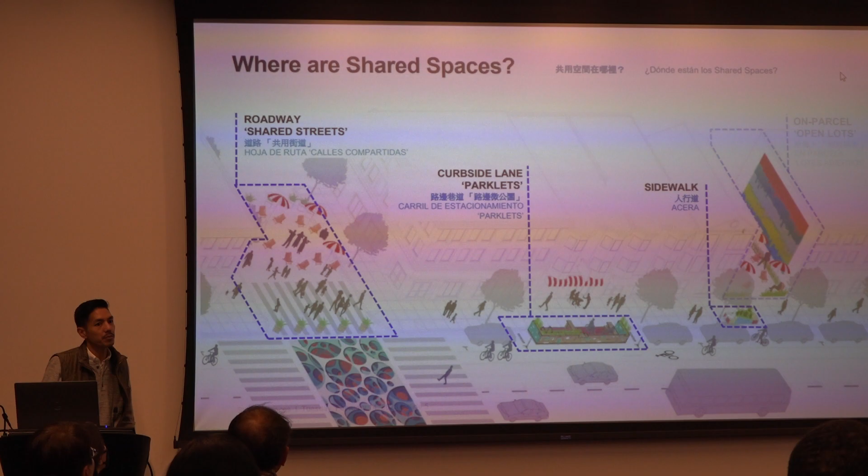Just as a reminder, shared spaces take place outdoors, in the streets, so sidewalk, the parking lane, on the roadway. The Shared Spaces Pandemic Program also permitted activations and pop-ups on vacant lots and parking lots. That's transitioning out of the Shared Spaces Program and into the planning department's usual planning permit scheme, so that's no longer part of Shared Spaces. But all of this other stuff, which it sounds like you folks are going to be helping communities do, will continue to be part of the Shared Spaces Program.

Grant applications are open. We do have equity grants available to help offset some of the costs associated with physical modifications to your pandemic parklets, for those ADA accessibility features, making sure we have the necessary clearances to allow our first responders, paramedics, and firefighters to do their work in case of emergency.

You can apply at sf.gov/shared-spaces-equity. Will this presentation be available, or should I be taking notes or photographs? This presentation will absolutely be available at sf.gov/shared-spaces, just this stub right here. Annie's really awesome about posting everything, and this is also being recorded, so I think today's recording will be posted, and we've done this training a few other times, and those have been posted as well. I'll follow up with an email to the group with the links.

In addition to the Shared Spaces Equity Grant, there is another grant through the Office of Economic and Workforce Development called the SF Shines Grant. This is for on-parcel, interior and storefront TI improvements. It doesn't apply directly to the parklet, but it's another way for you or your client to offset some of the expenses that come with making these spaces part of the permanent program.

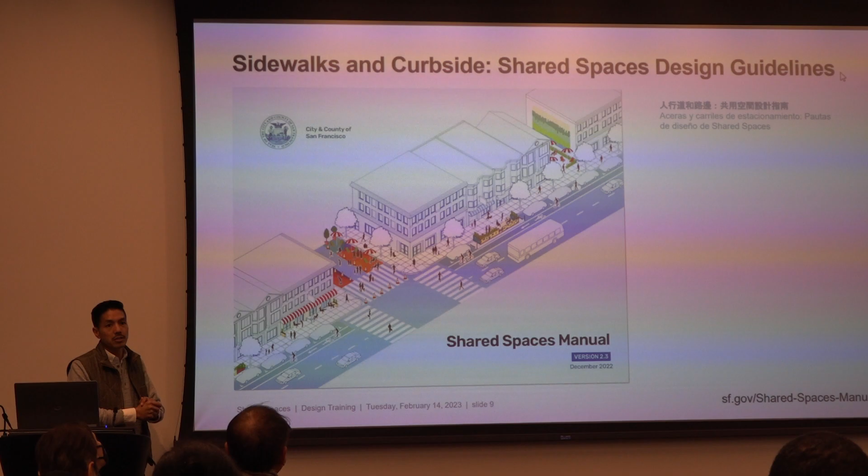Another really great resource, especially for you designers out there, is our manual, available at sf.gov/shared-spaces-manual, down there on the lower right. This is a really comprehensive guide. You have dimension diagrams, photos of real world conditions, what to do, what not to do. We encourage everyone, whether you're a small business, restaurant operator, proprietor, or a design firm or consultant, to use this as your Bible to make sure you are eligible for a post-pandemic permit.

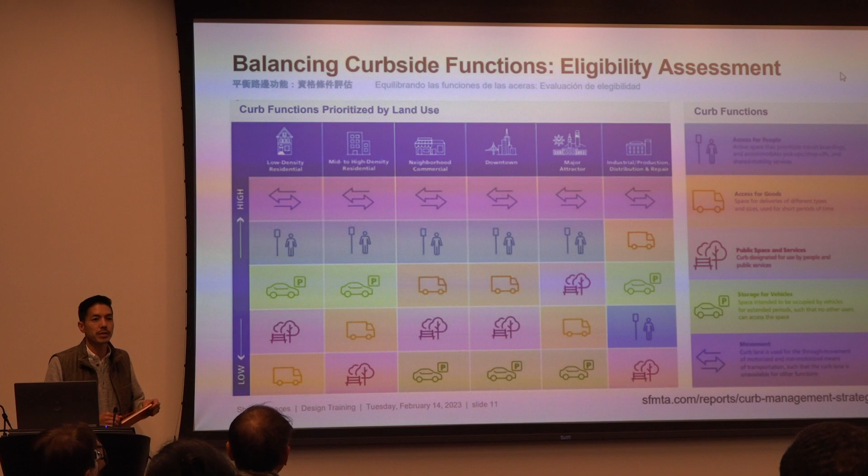So today we're really going to focus on, there are a lot of design considerations. Creating a brand new public space out in the middle of the street is a really complex design challenge. We're going to focus today on 3 or 4 of the main ideas that are really important to keep in mind. Before I do that, though, I'm going to hand it over to Monica from the MTA to talk a little bit about how the city's thinking about curbs in our corridors and balancing all those needs and functions.

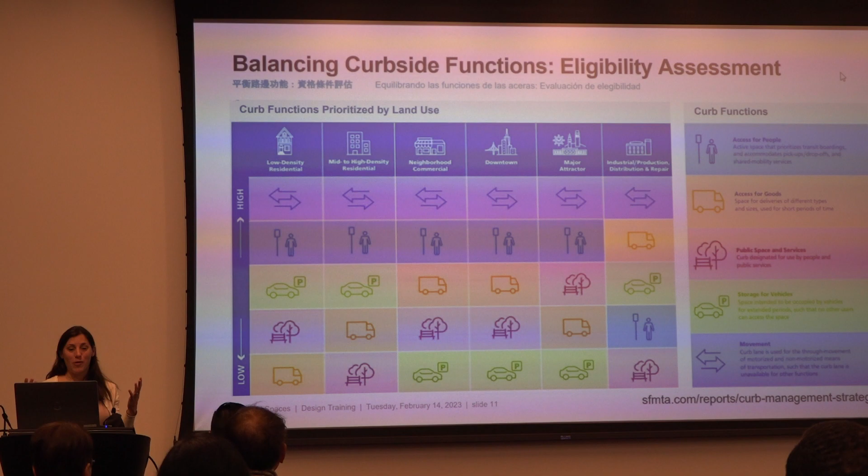Thank you, Robin. Great introduction. So my agency, SFMTA, oversees the public realm, streets. Our partnership and role in shared spaces is to make sure, like Robin mentioned, that these new public activations in the street can balance all the other needs that a street serves.

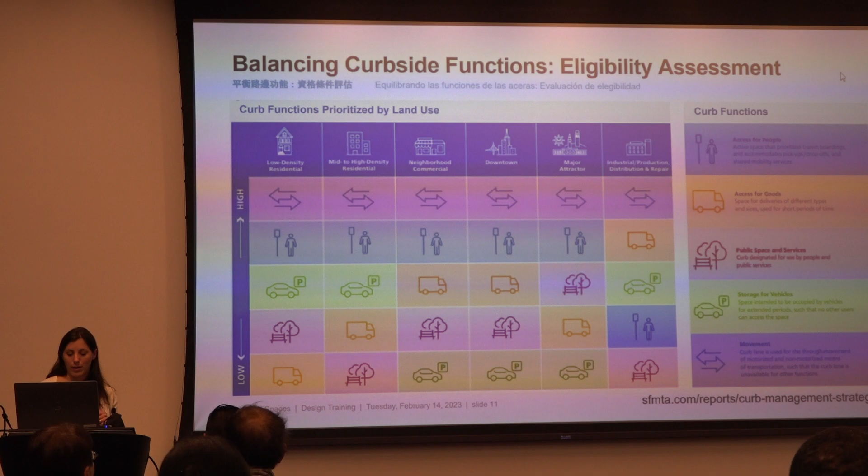This diagram is pulled from the city's curb management strategy. Particularly, I think what's interesting is the third column, neighborhood commercial - this is mostly where we see shared spaces, and this is how we prioritize and allocate curb space. Movement is primarily important in these areas - access for people, access for goods - and then public space and parking follow. That's the hierarchy we approach our methodology with.

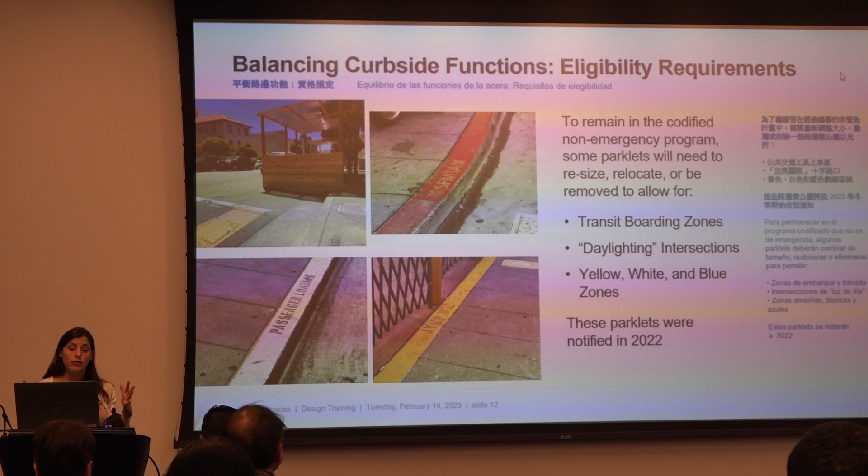So what that looks like on the ground - how we apply that - is we visited every corridor, every block, because every block has unique characteristics and needs. We assessed transit presence, how many curb cuts there are, loading needs, parklet demands, and created a bespoke evaluation so that when parklets and businesses apply, we have a sense of how much space can be occupied in the public realm. Is a footprint of one space okay? Can you have two spaces? Does that need to be shifted to accommodate a transit zone or loading zone? That's how we apply it in practice, unique to every block in San Francisco.

One of these hierarchies is safety, Vision Zero. This is a low-cost measure of improving sightlines at intersections, really effective, where we can paint red curb at the near side and far side of an intersection, making sure a parklet clears that distance. Generally we like to see 20 feet near side - the beginning of an intersection - and 8 feet far side, after crossing the intersection. That ensures clearance and visibility of turning cars, so they can see people tucked behind a parklet structure. Some parklets are bigger than a parked car, so we're more generous with this daylighting requirement, since parked cars are smaller while parklets are there all the time and are taller.

Another requirement I like to talk about, new with the program we're transitioning into, is the 2 parking space cap. This allows us to balance the street, bring better balance back, and ensure we're meeting all the curb demands I shared about earlier. Of course there could be exceptions where it's possible to have more, but this is a good anchor point. Some locations may only support 1, or hopefully not none, but this is the max we're looking at, whether it's a perpendicular, parallel, or diagonal space.

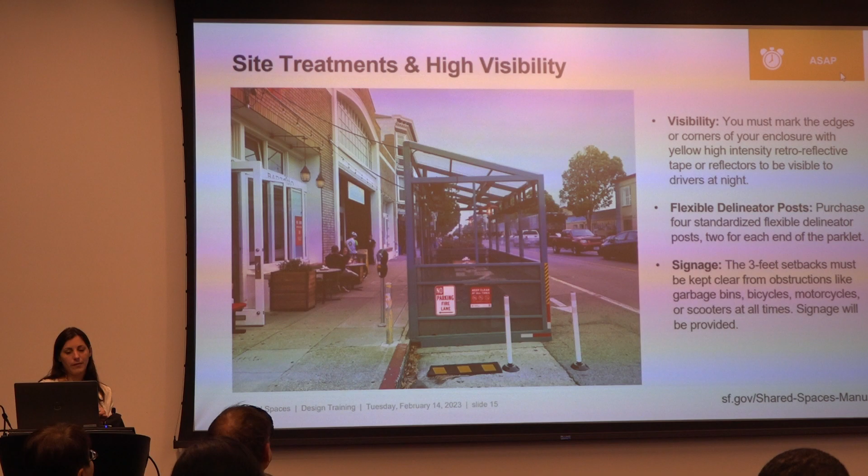This example calls out what we talked about - visibility at the crosswalk, the cap - and also the 3-foot setback. What we like to see is a movable curb and flexible delineator posts. These are low-cost measures, easy to install, and there are supposed to be 2 delineator posts plus that curb at the 3-foot setback on either side. If it overlaps with the daylighting, as this example does with the red, you may not need an additional 3-foot setback - it may be possible for that to overlap.

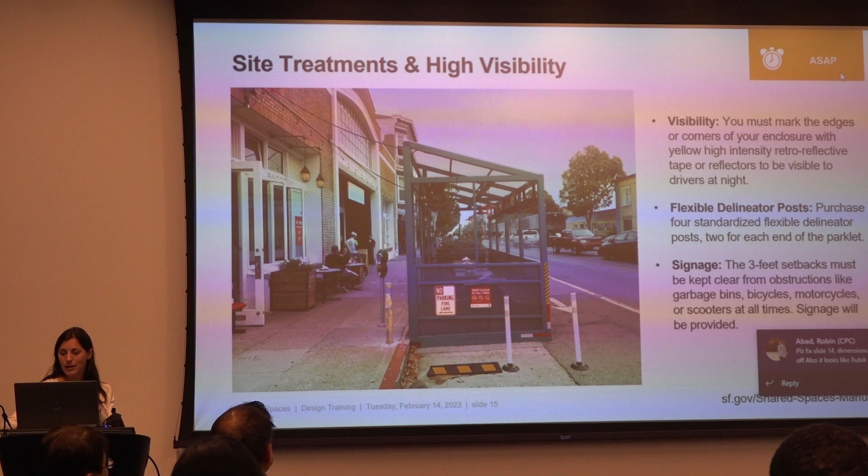This example shows why that's really important, not just at the end parked vehicle - ensuring the wheel stop helps so the car isn't backing up into a parklet structure. Also shown is what that looks like between two parklets - you don't want two parklets too close together without a desirable gap for emergency access. So these are some good examples, and what we want to try to avoid.

I'll pass this off in a moment after talking about some of those primary SFMTA elements. This slide shows a variety of the high priority categories we want to talk about today, including setbacks from crosswalks, which we already covered, and other things like making sure you have your address on the outside of the parklet. That's really important - it helps emergency access see they're accessing the right building if it's blocked. On the building itself, reflective materials are really effective and low cost to have on the outside of your parklets. Visibility above 42 inches, we'll talk about that more - that was in the PSA. Some of these show the fire department priority categories, like the gap in the middle and visibility above 42 inches.

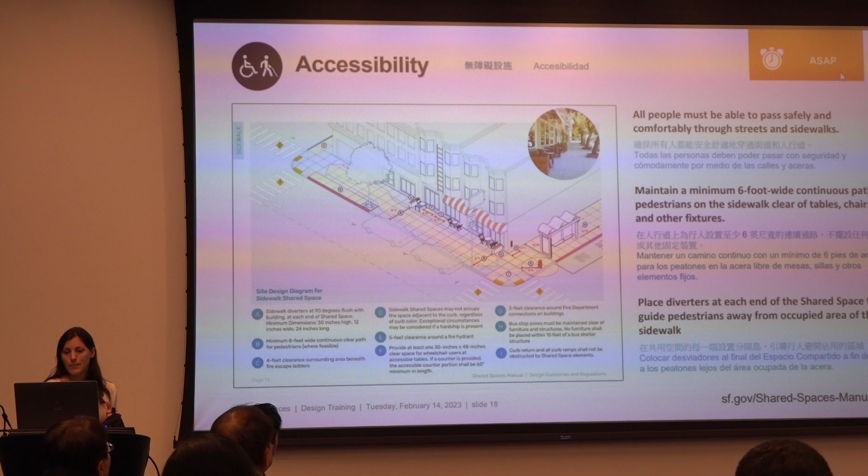So I think I'll kick it back to Robin at this point, and I'm not sure what we'll bring up for a minute.

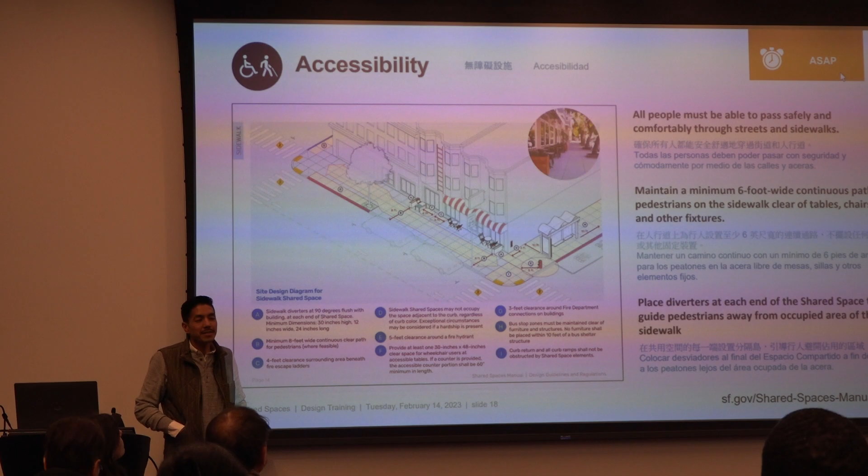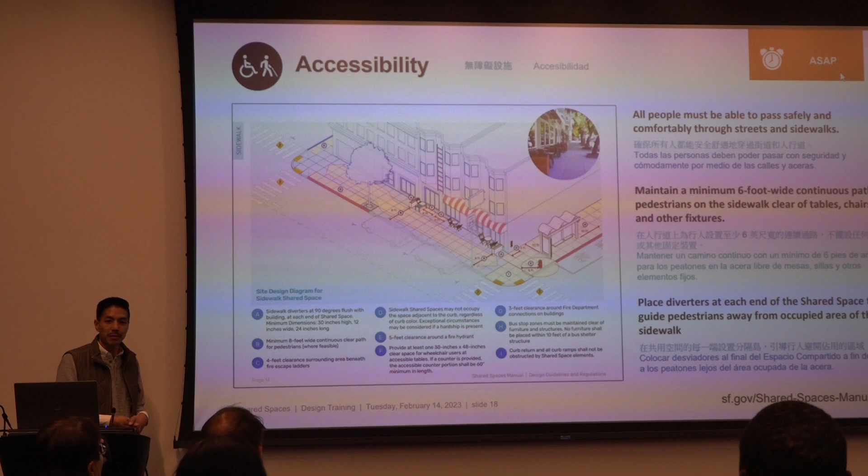Great, so some basic ideas about maintaining ADA accessibility on our sidewalks as well as within parklets. A lot of these guidelines have existed for a long time, so folks in the room who own a restaurant and maybe have some sidewalk seating outside are already familiar with the need for some of this. The biggest takeaway, and the thing we get the most complaints about, and the thing we are most anxious about when it comes to a lawsuit, is maintaining the clearance on the sidewalk.

This is a challenge, right? In SF we have narrow sidewalks. We don't have generous sidewalks in all of our commercial corridors. We've got bike racks, tree wells, parking meters. But really what we need to be mindful of is having at least 6, if not 8 feet of clearance at all times that is totally unobstructed by tables, chairs, A-frames, bus carts, anything related to your dining service and operations, or any of your retail operations - they really need to stay out of that 6-foot clear zone.

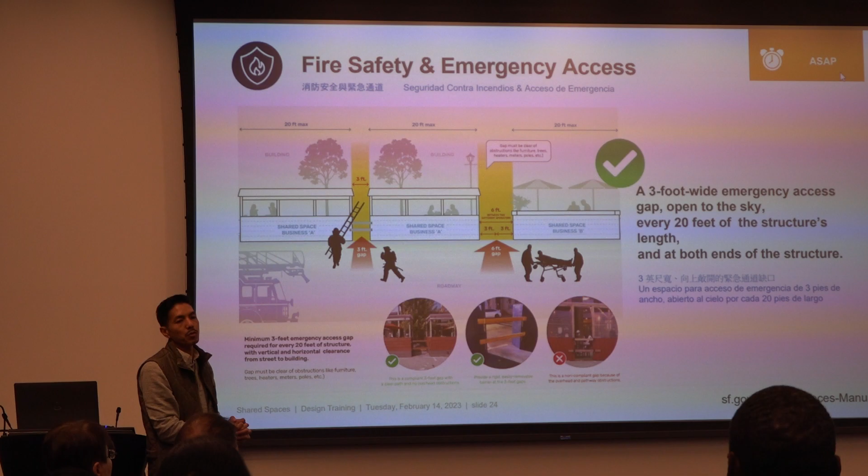You're absolutely right, curbs are not standard. We've got 100-year-old granite curbs that in some neighborhoods have subsided and are lower. The standard is a 6-inch clear gutter right at the curb. But if you're working with site conditions and you're otherwise able to maintain clearance for drainage, maybe you're making that clearance under the gutter—we'll look at a diagram of this later—maybe it's more than 6 inches wide, so that you have the equivalent of 36 square inches in area for water to pass through. More on that a little later.

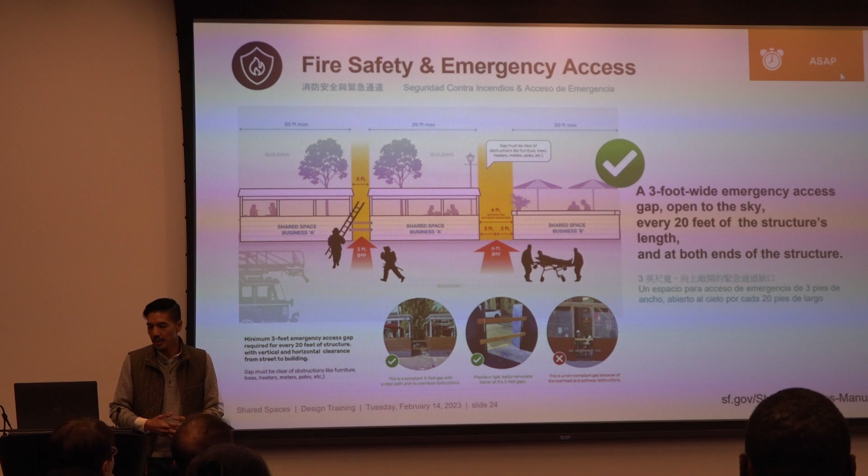So I'm going to pause here, and I'm going to invite up Assistant Fire Marshal Chad Law to talk through a few of these slides pertaining to design for accessibility for our first responders.

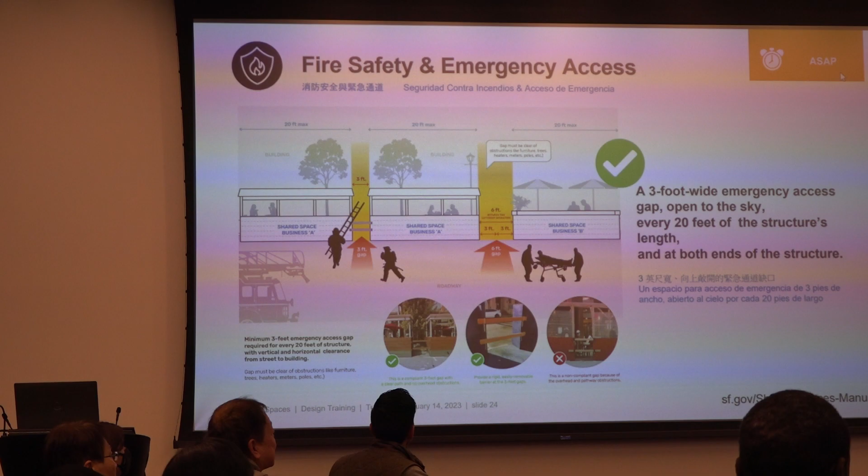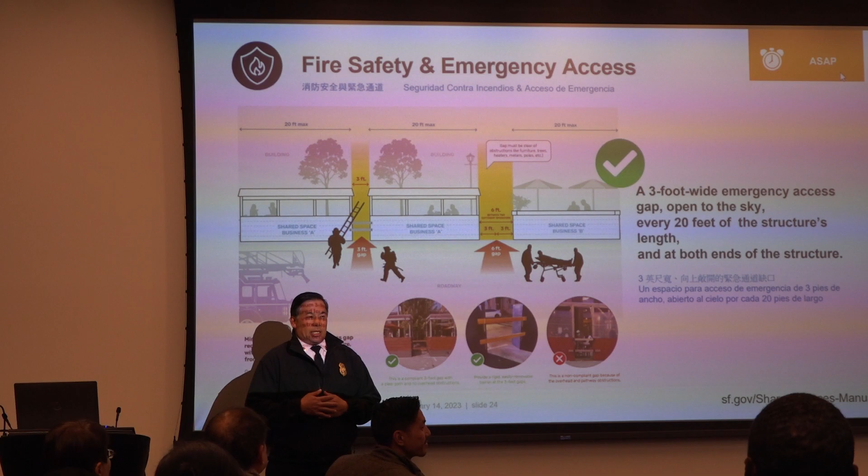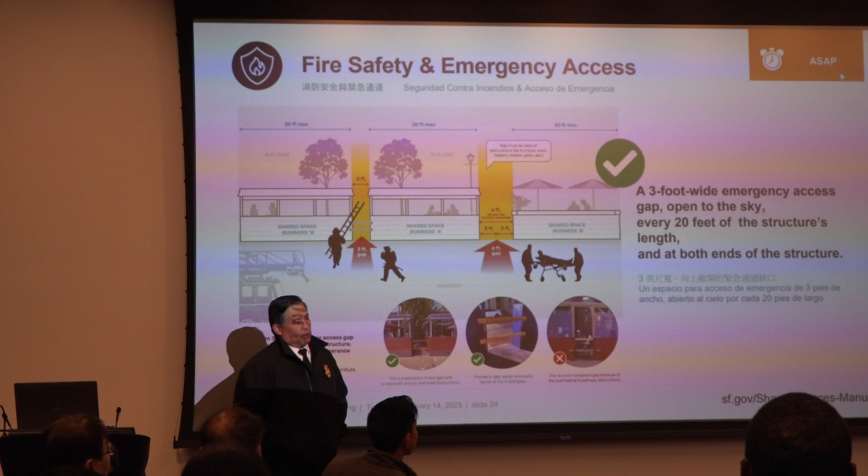Hi, good morning everyone. My name is Chad Law, Assistant Fire Marshal for the Bureau of Fire Prevention and Investigation. I work for the Fire Marshal's Office. I've been working with this program since the beginning of the pandemic, so it's evolved a great deal, and we've collaborated this entire time. I want to introduce Inspector Brandon Murray—I'll give a brief overview, but I'd love for him to explain some of the details since he's actually out in the streets.

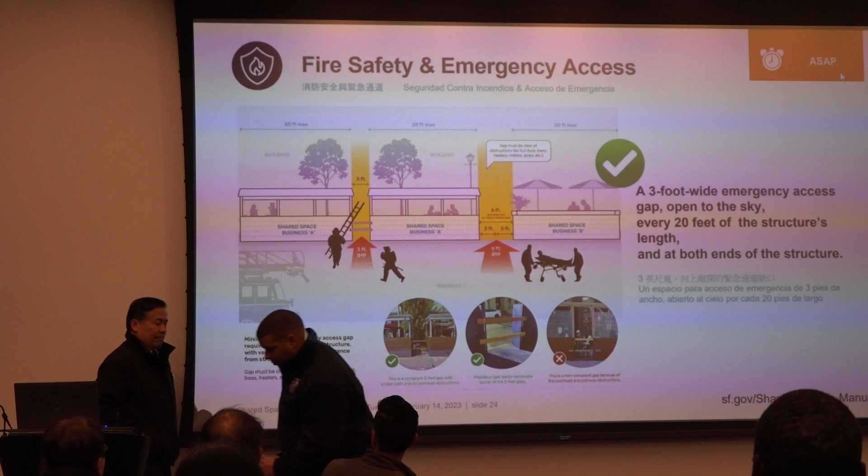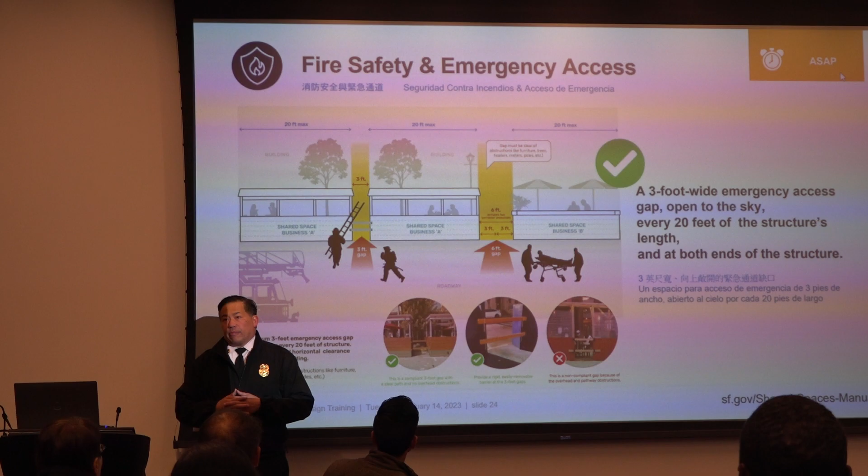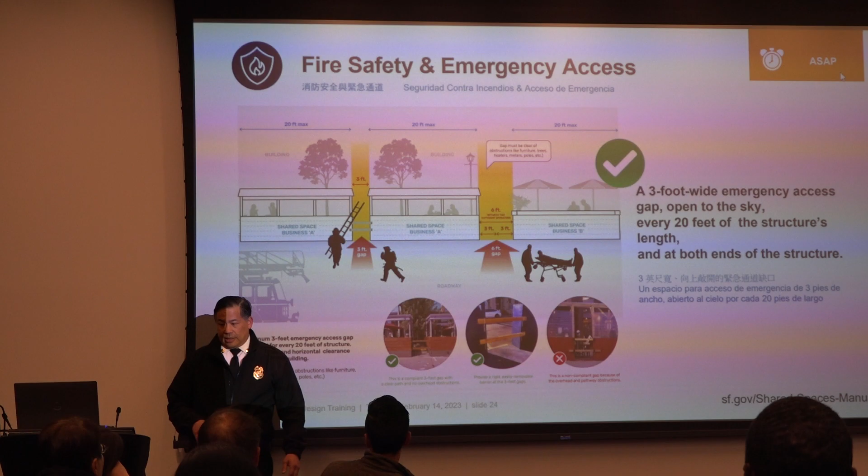First of all, I want to tell you why there's a lot to think about when you're building your permanent structures. For us, it's simply that we're used to being able to go in between cars, and every time 911's called, it's time sensitive. This is my 25th year in the fire department, and I've worked in North Beach for 18 years. Every building and restaurant is completely different—the structure, the roof lines. We've created these guidelines that are pretty basic, but we need to get through the streets and to the buildings as soon as we can, whether it's a fire or a medical call. It's time-sensitive, so that's why we came up with this as an interagency group. 3 feet is kind of general, but there will be questions at the end.

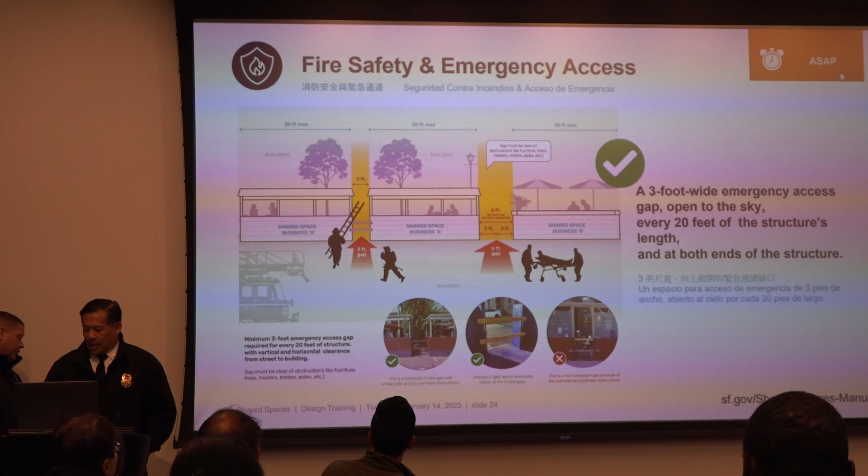So right here we've got the emergency access clearance, and it's supposed to be open to the sky. So for your shared space or parklet, every 20 feet you're going to want to have an access gap. This allows the emergency crew to access any equipment through it—gurneys, ladders, any equipment passes through this gap. That way a ladder can reach the building or restaurant or structure, to protect the patrons, the shared space, or the building as well.

So right here, through the gap, this is required—we have the 2x4s in place marking the emergency gap. In the field you'll see doors, but you don't want to use doors because that blocks our gap. So here there's no 3-foot gap applied, and with this shared space and other shared spaces, there's no 3-foot gap either.

Congratulations, this is—it's a microphone. Oh, it's a microphone, okay. Oh, we have a question in the back.

Go ahead. Yeah, for these gaps, on electrical, do you guys prefer an electrical wire cover where the gap is, or would that also be a barrier for you? Any electrical or any decorations and lights in that access is not allowed.

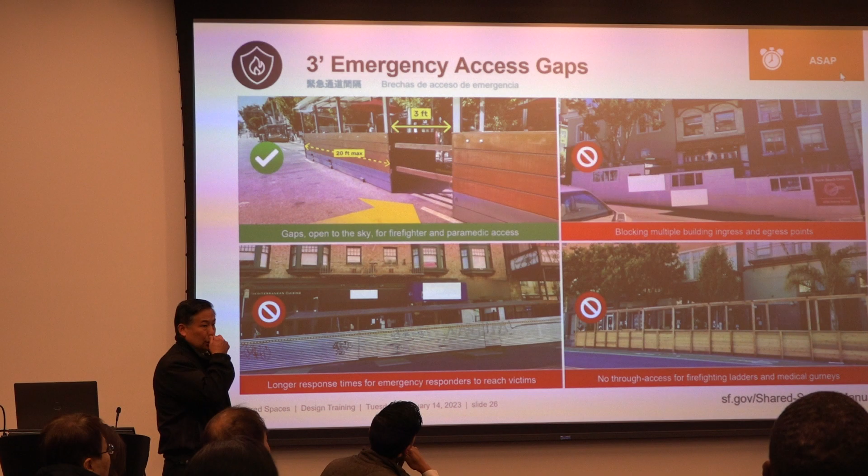But if we need to run a cord from one part of the parklet to the other, can we run it? It's supposed to be on the corner—I don't have a picture of that, but the corner of your parklet or shared space is where the cord runs through to connect. But how can the cable cross the 3-foot gap? That's the whole point—like the ladders, when it says clear to the sky, it means clear to the sky. So where's the electrical cable supposed to run? Suppose the cable from the building is on that pole.

Right, and it crosses the gap, it can go underneath. We literally want to do this. There's gonna be a case-to-case basis and different ways to do stuff. Maybe you run it under decking, something like that. But this is our goal, if that just clears it up.

You may have answered this before I came, but the 3-foot gap, can it be anywhere within that 20-foot park space, or does it have to be exactly in the center?

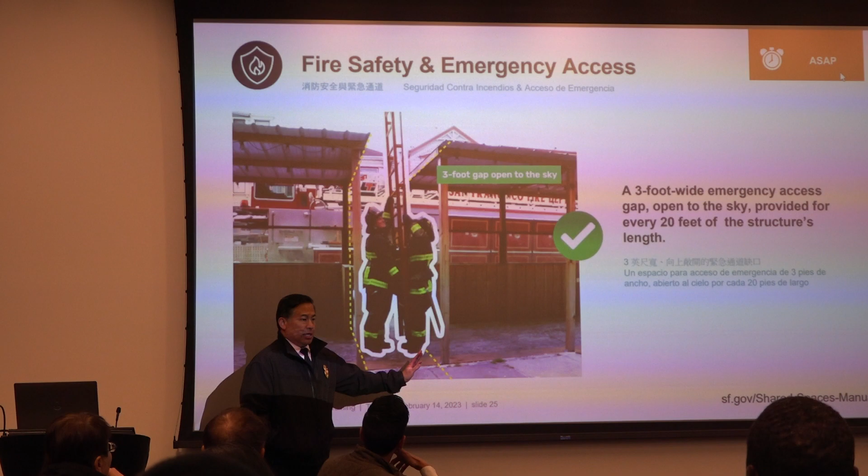Here's the deal, a lot of times there might be a little offset because we don't want them lined up with trees or parking meters, since that defeats the purpose. So we do want a break in it, and 20 feet is straight, but if you have more than one, you need 3 feet between the two spaces.

So if you only have 20 feet, you don't need a 3-foot gap. If your parklet is 24 feet, that's good enough.

So this is the main reason I'm here. We built a parklet that is 25 feet wide, and we did everything to code, spending a lot of money doing it all to code at the beginning so that we would be able to keep it. We put the 3-foot gap in the middle, we have the 2 separate roofs, everything's to code, it was all approved.

But now they've changed the code so that we have to bring it in 3 feet at each end. In essence, you guys aren't really gaining anything out of that, because we're gonna take away the space in the middle now, but we will have to completely knock down a $20,000 parklet and build it from scratch.

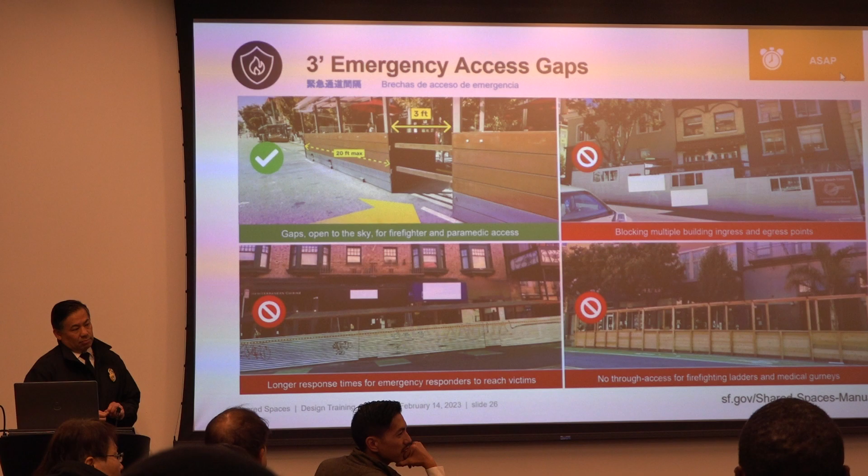It's just to move the access from where it's actually better right now to the side, and I'm trying to figure out, because I've heard a couple of times now, Monica mentioned it, Chad mentioned it, every block is unique and has different needs. Every building is different, but we seem to have one code that fits every situation.

There will be, yeah, we'll review it case to case, but the reason, do you guys know the reason why we have 3-foot setbacks on those?

So the idea is that if we have the general rules that apply to most of the parklets, or shared spaces structures, we have that 3-foot setback.

So in that case, that's something we could review and look at, and maybe you're open on one side, or you're in a corner. No, we're in the middle of the block, there's no parklets on either side of us.

So the question for us is what happens in the future, the next business that wants to do it, they get a smaller parklet because yours is built already. So I don't know, that's the weak point, can you address any of that?

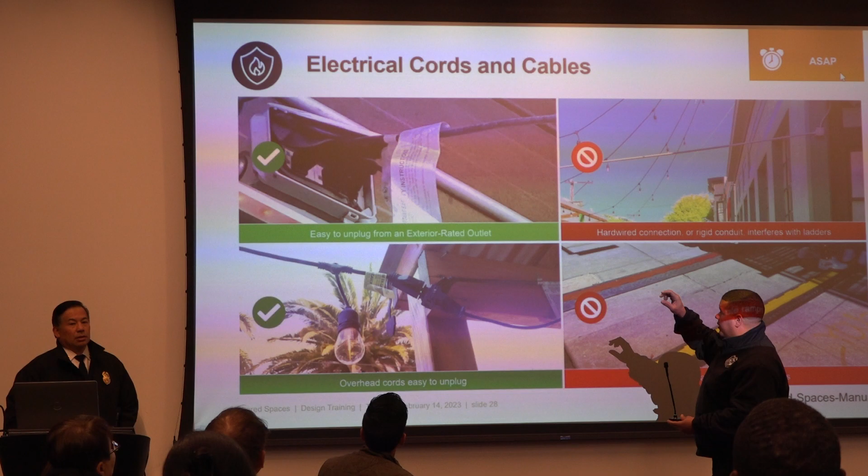Similar ideas, as you can see with parking meters: we don't want anything like chairs in there. I think it's pretty self-explanatory. Chairs, decorative lights - you talked about this earlier. Like you said, if you have electrical wires or decorative lights connected to the shared space or the building...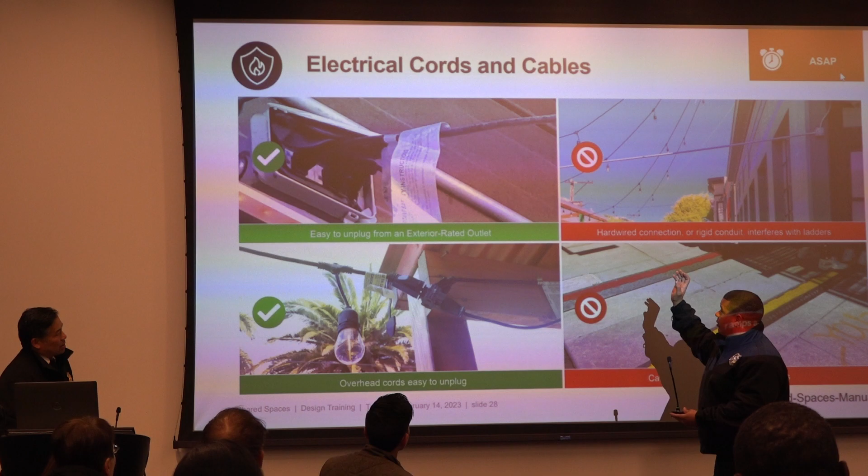If that also blocks the 3-foot emergency gap space, it can't be allowed. It's supposed to be only on the corner ends, and the receptacle needs a quick disconnect. We have a tool, a hook, so if a wire is connected to another wire, it won't be easy to just pull off. In emergency operations, depending on how the wire is connected to the receptacle, it's easier for us to use a tool to just pull it out.

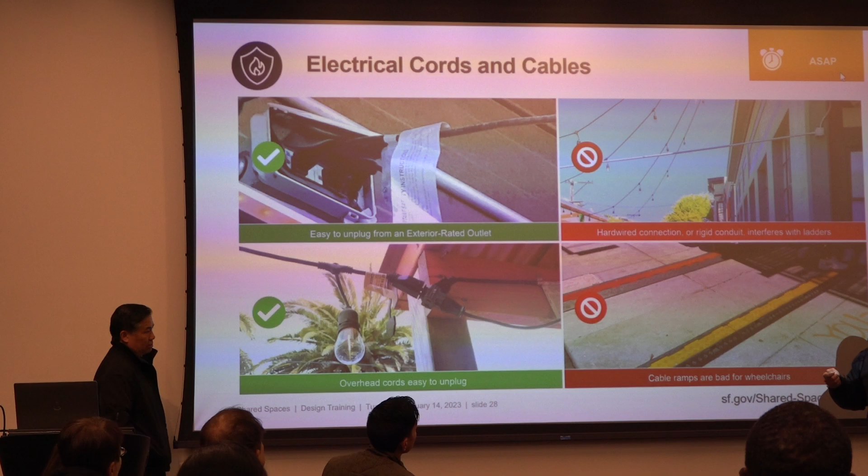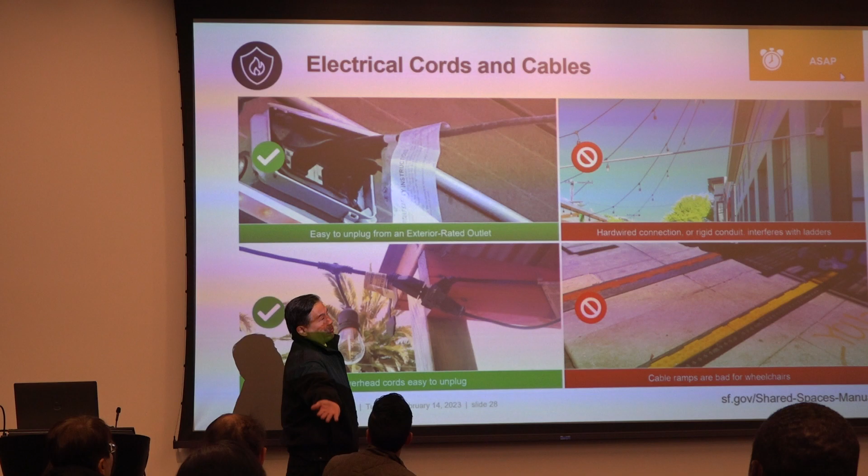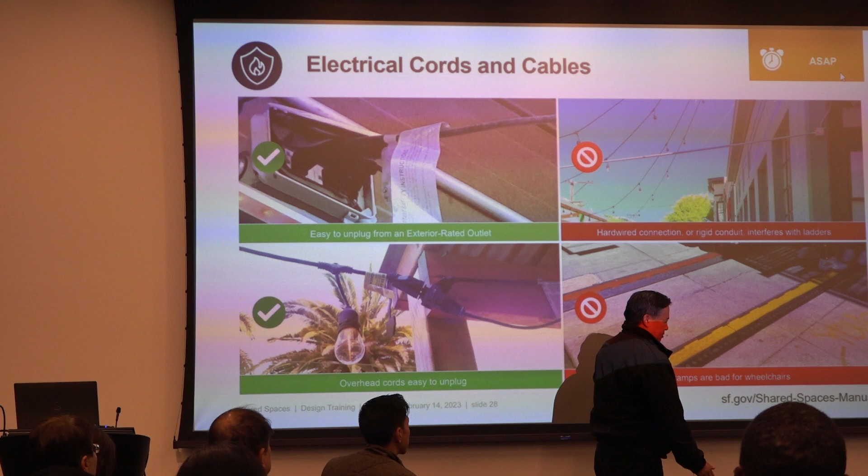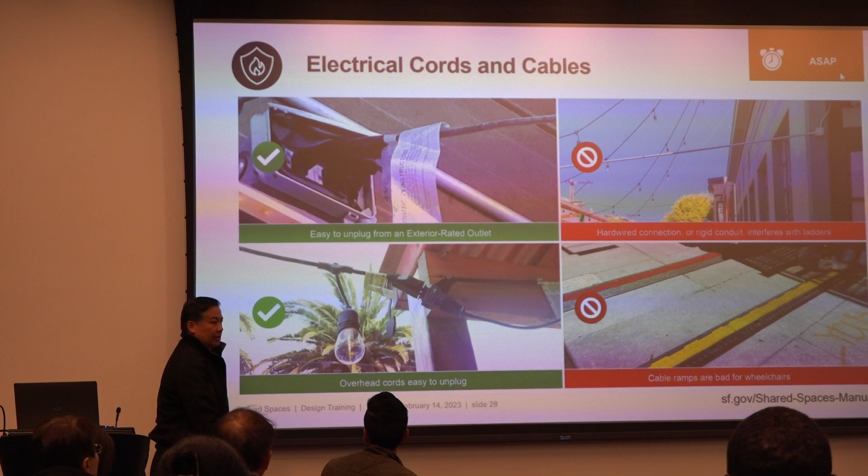Also, strategically, if there's a tree nearby, we raise ladders this way - if this is the building, we'll raise it this way. If there's room between the cars or parklets, it's actually easier - that's called a flat raise. Otherwise we do a beam raise, where we lay the ladder down about this far from the building and then raise it this way. As we raise it, it's super heavy - they're made of wood, hundreds of years old - and any obstruction delays it. We can't let that happen when we need to get to a window. I've rescued people out of windows before and gotten them down; we don't want to delay that. So these we can just pull down with the ceiling hook and then raise it, and it's super fast.

Talk about sightlines if you want - I can sneak across the street, or... visibility is a big thing. If there's a fire, even a kitchen fire, a flue fire, or a trash can fire, we have 13 rigs - you know how many people that is? 87 or something like that - showing up within 5 minutes. The incident commander stands across the street and is responsible for the safety of all the civilians coming out, the firefighters, the streets. If this is blocked up like a wall, he or she can't make calls. That's why visibility is a big deal. If it's opaque, we can't see if the fire's creeping out on this side or that side, or if someone's in the window. So that's the visibility factor, over 42 inches.

Just real quick, Chief - that's all directions in the view. So your shared space, however the picture is cut off, sometimes you have ends, but the whole entire view is supposed to be 42 inches. The chief across the street is really like the quarterback making calls, and once it's all blocked, he can't see if the firefighter is injured or not. That's what we're going for there.

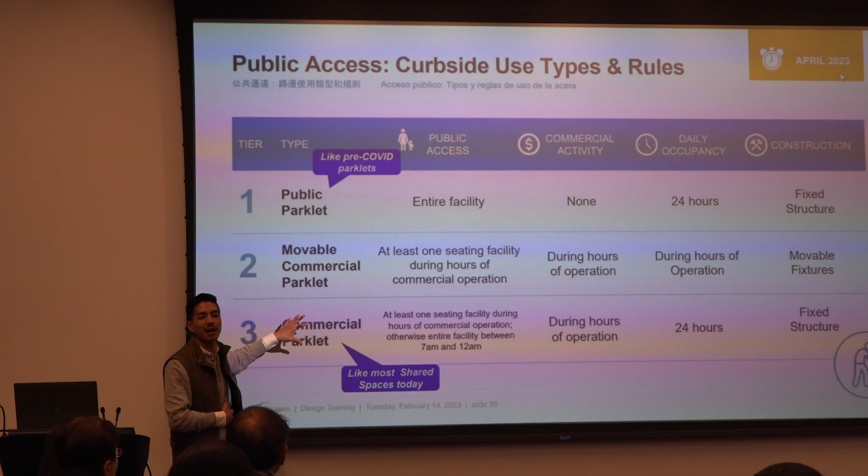We didn't have commercial parklets before the pandemic, so that's the operational compromise the Board of Supervisors reached after discussing that provision a lot. So folks who pass all your final inspections—everything looks safe and accessible—you'll be getting your signage package from the city, and one of the things it will include is a sign for your public seating area.

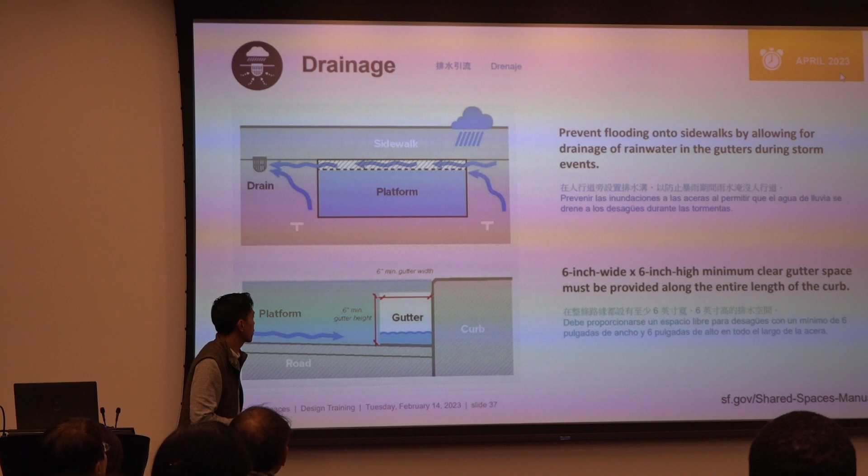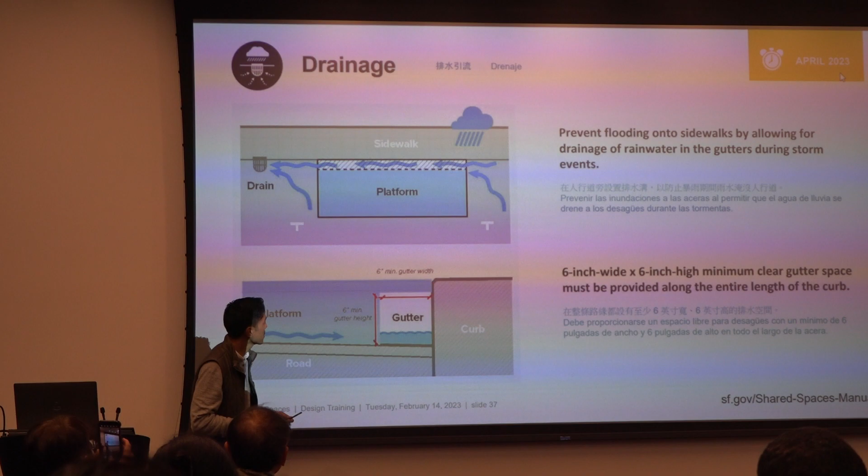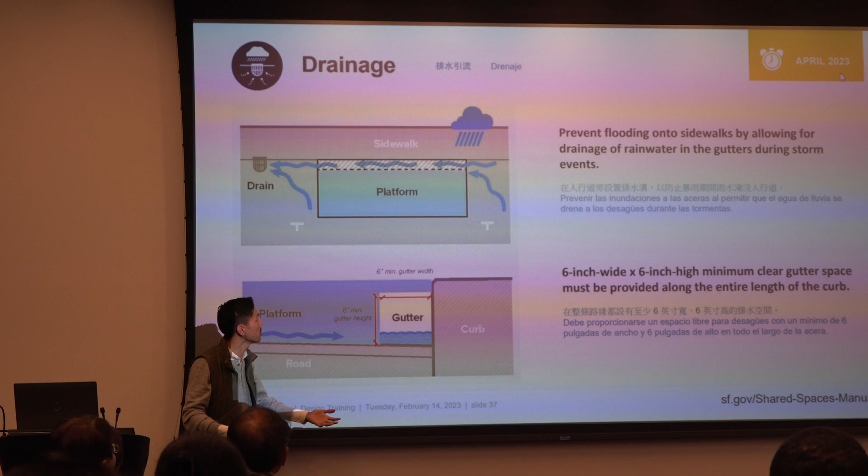We talked a little about drainage earlier. There was a question about how you maintain a 6x6 inch box all along the curb if your curb has subsided, which happens in a lot of places. Again, this is the ideal standard, and our goal as city departments is to work with you to help meet the performance criteria. The point is we don't want our parklets blocking up drains. Flooded gutters mean flooded sidewalks, flooded sub-sidewalk basements, and flooded storefronts—it causes all kinds of issues.

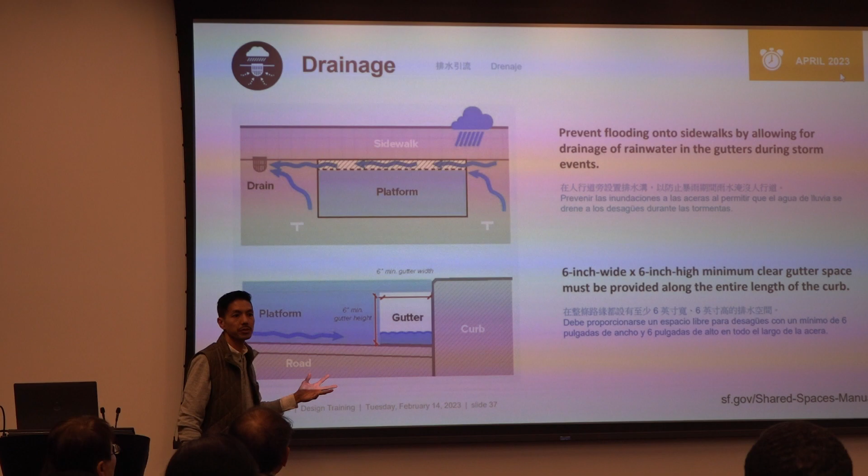It's a really simple design detail that a lot of you have already implemented. But moving forward, as we transition everyone to a post-pandemic permit, we're going to want to make sure to fix that. This is a condition we do not want to see.

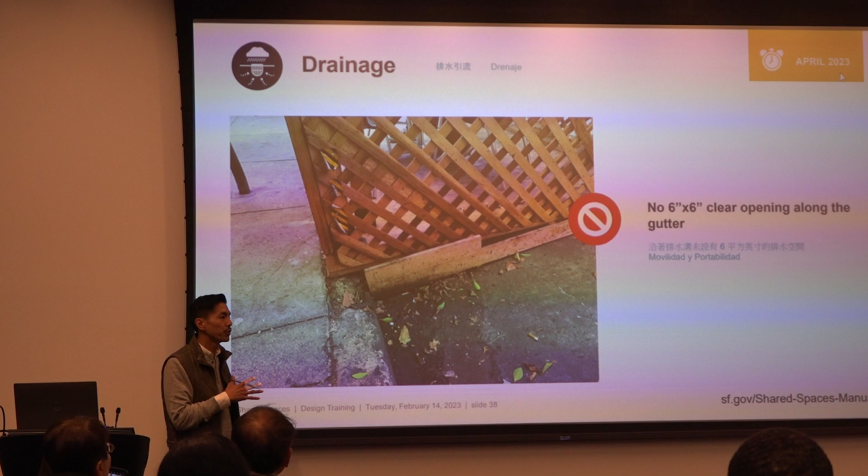We don't want to see this. This is in my neighborhood—that's my parklet. Is this your parklet? Yes. Okay, we try to block out everyone's names. I've taken it down already, it's not there anymore, but yes, that's mine.

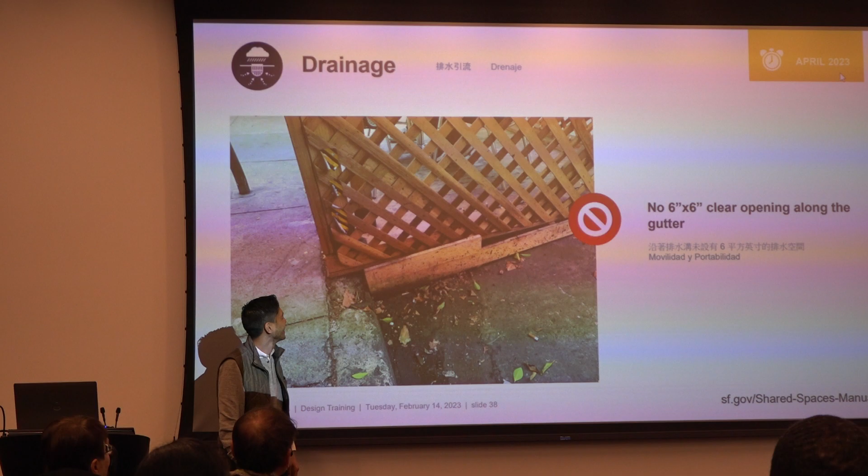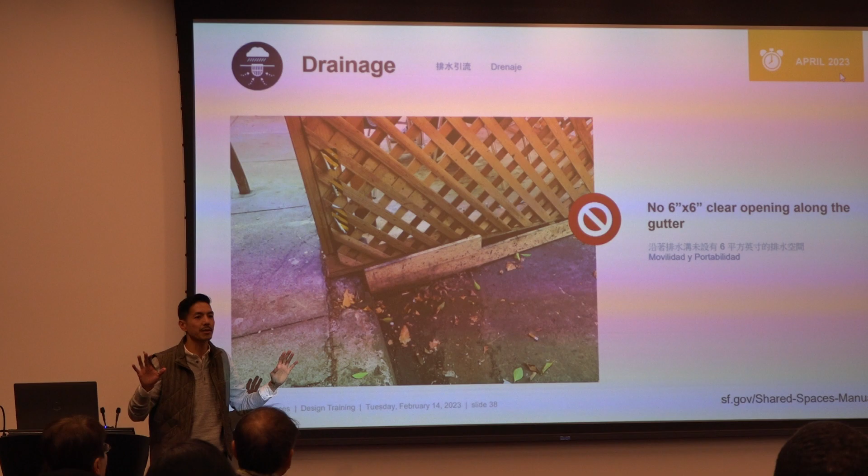The reason I bring it up is because I came here on a day where it wasn't wet, but I had seen this in the past with water coming up—it would build up on the parklet deck and sort of overflow onto the sidewalk. Nobody wants to slip and fall in front of their business or in their parklet. We don't want to create any dangerous conditions.

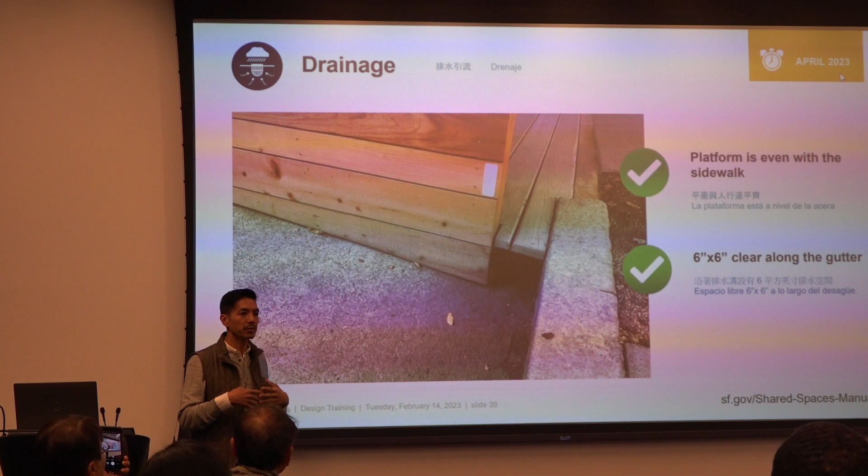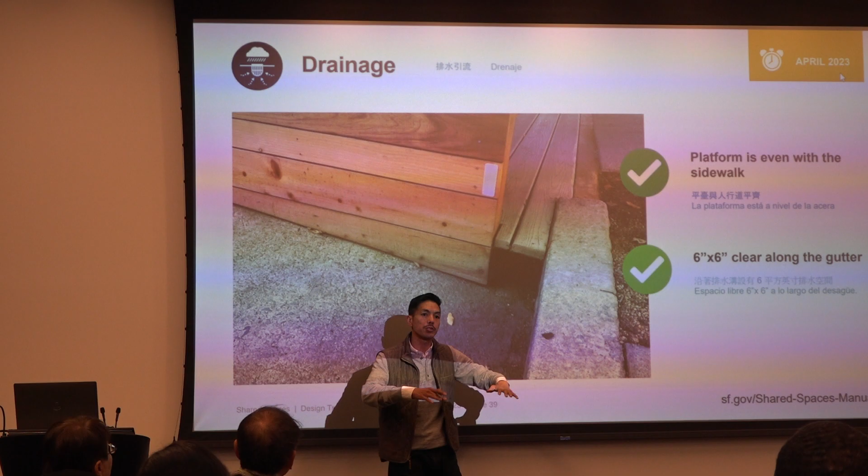So here's a situation that's ideal—you've got a clear gutter. A lot of times designers will slap some mesh or screen onto here, or make panels along the curb removable so you can get in there and power wash. Again, we're not going to be strict with you about how precisely to build it—we just want you to meet the performance criteria of keeping rainwater flowing.

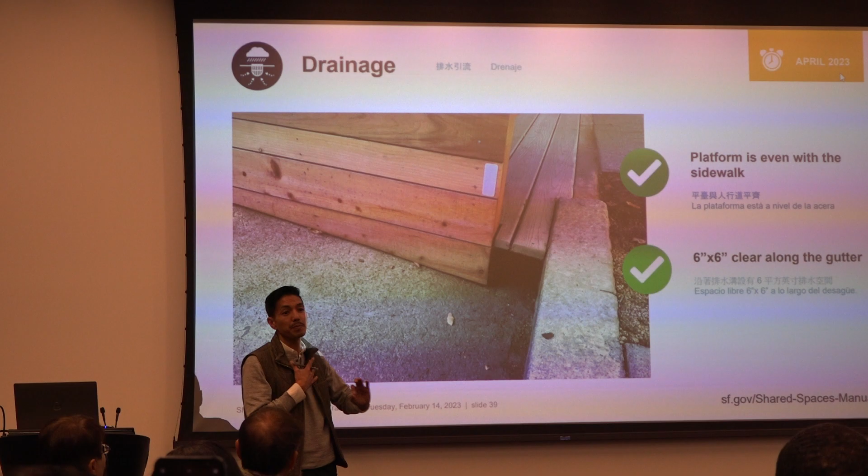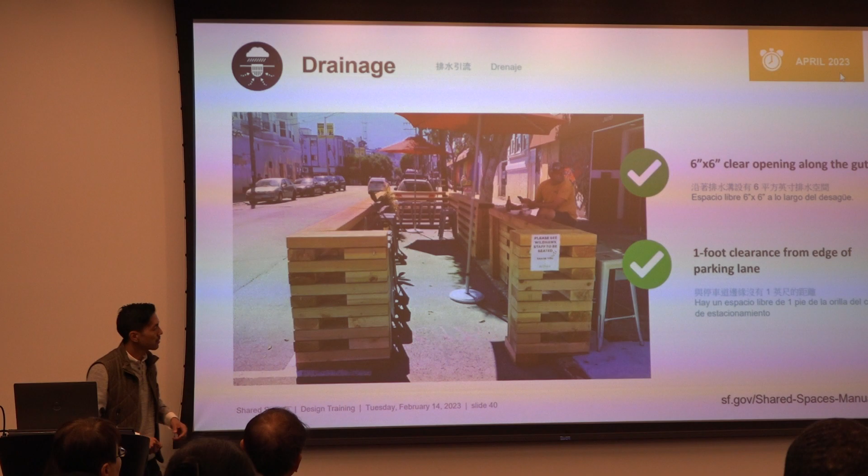Can you go back to last? So in that case, there's no 6-inch height for the curb, that's what it is. So if I had a 6-inch curb in front, I cannot do this? Probably not—that's in front. The point is that water can run through this, right? I'm talking about storm. The deck is part of it. There is no deck here. Right, I know, so that's because the curb is very low, that's what it is.

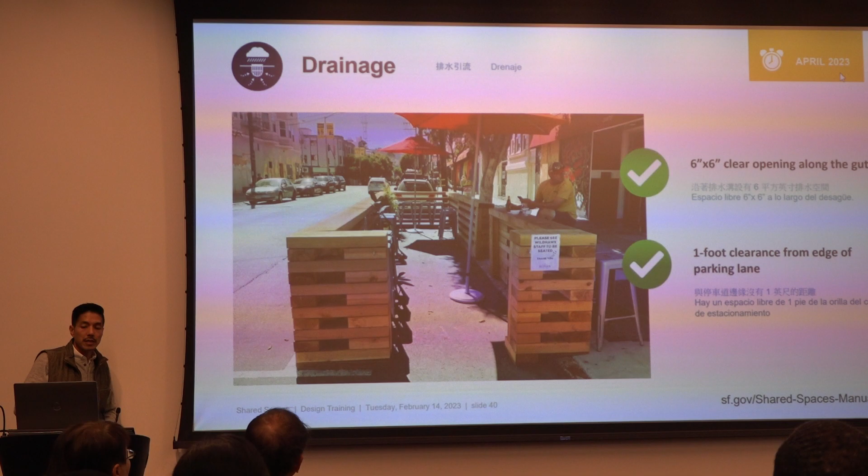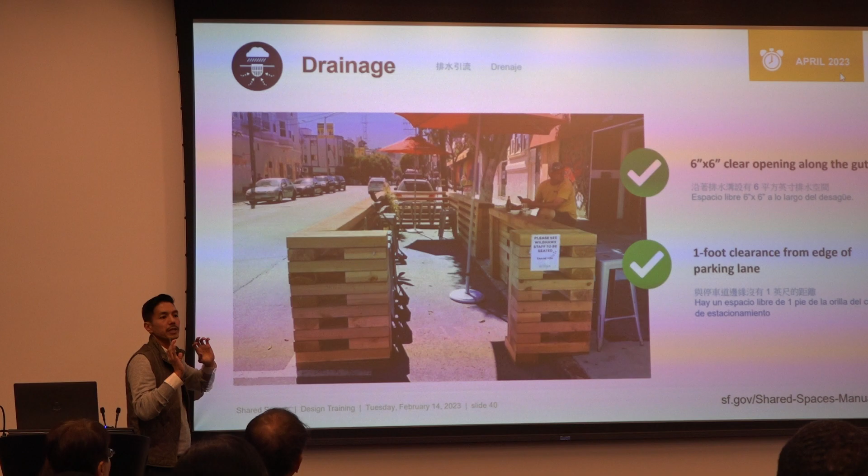I have a question back to this one—you're providing parking on the other side of the sidewalk, do you still need to put a ramp in order to give access? Could we take the equivalent facilitation on the other side? You mean for ADA seating? During the pandemic, if you had sidewalk dining tables and chairs along your building and a parklet, you only needed to provide ADA accessible seating on the sidewalk—they would count as a unit. Moving forward, what the Mayor's Office of Disability wants to see is an accessible table inside the parklet, or an accessible facility.

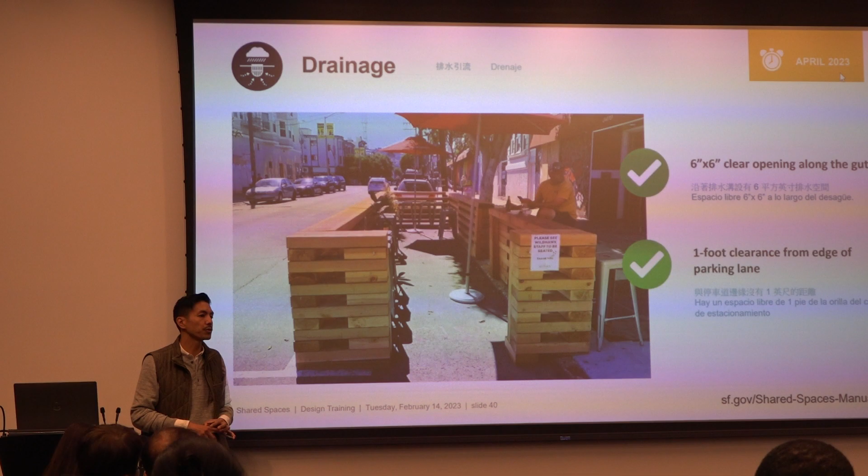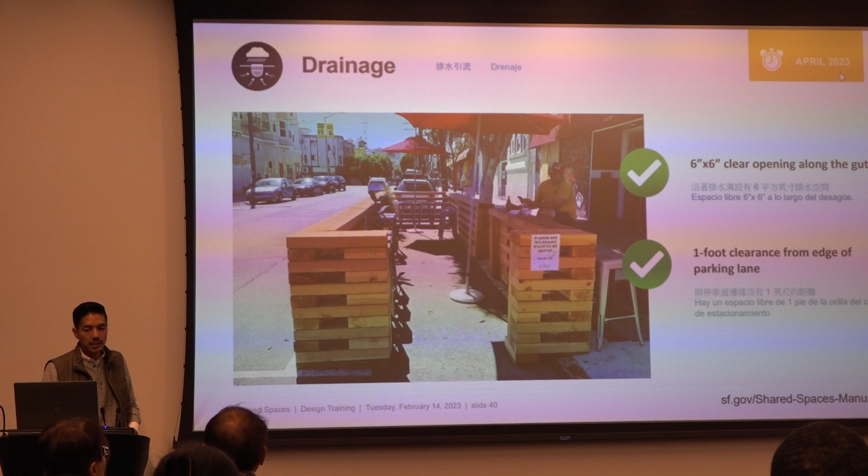So if you want to build something like this, can I just put a ramp? Let's say my curb is 6 inches high—can I just build a ramp right there by the entrance so the wheelchair can go down, without even a deck? The ramp would need to be within the footprint of the parklet, so it depends on where you want to put it. An ADA ramp can't be any more than 5% in slope, so it's just going to depend on your conditions.

This is why we're recommending that you submit an application. An application requires a basic site plan - you don't have to do a whole architectural plan set. Before the pandemic, we asked for a full architectural plan set; now you just have to do a site plan. Tell us in your site plan how you're going to solve these issues, how you're going to get people into the parklet, where your 3-foot gap is going to be, how you're going to avoid trees. Those are the things we're looking for so we can give you feedback and help you get your permit as quickly as possible.

Just some quick notes on how this is all going to go down. I'm assuming folks in the room haven't submitted a permit application yet. But once you do, provided it's complete and we have enough material to work with, the city departments will give you feedback on how you might need to adjust your site plan so it better meets conditions. We're going to try and do that within 30 days.

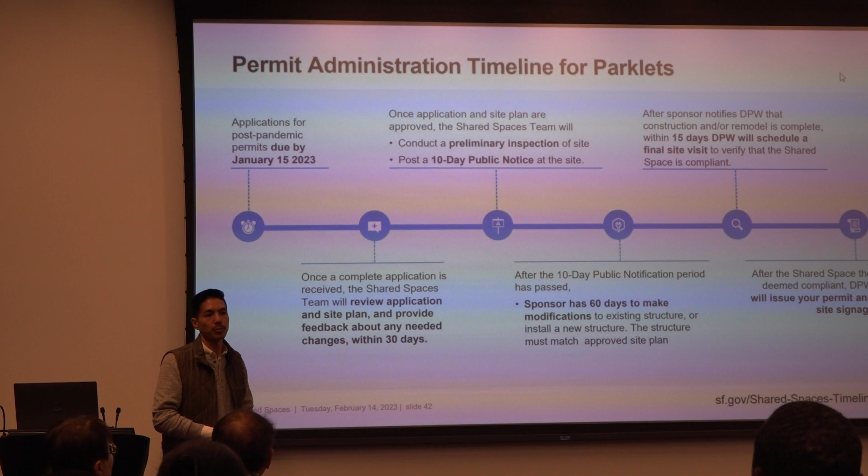After your application's approved, rules that we suspended during the pandemic have been reinstated by the Board of Supervisors - starting April 1, for anyone applying for a permit on or after that date, there's a 10-day public notice. Folks who run restaurants are familiar with noticing if you're doing certain tenant improvements, a conditional use, or a change of use. This is pretty standard for permits across the city - it's an opportunity for your neighbors to know about your application.

After that 10-day notification period has passed, we're giving folks 60 days to implement those modifications. Of course we're going to try and work with folks case by case, but this is the standard interval. We don't want folks waiting until August 30th to implement stuff, because we don't want ADA lawsuits, we don't want liability issues, we don't want a public emergency or a fire to result in someone dying. We're trying to get as many folks as possible to make those improvements as soon as possible.

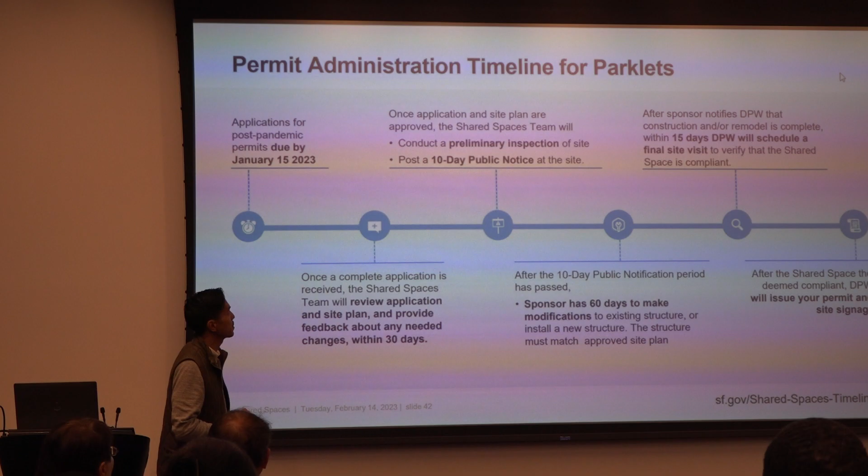After you let us know you've cut your roof back, changed your cables, fixed your gutter, and addressed all the issues at your site, DPW will come out and do that inspection - hopefully the final one. Hopefully everything is clear, it looks like your site plan, and we don't see any issues. Then you get your permit and your signage.

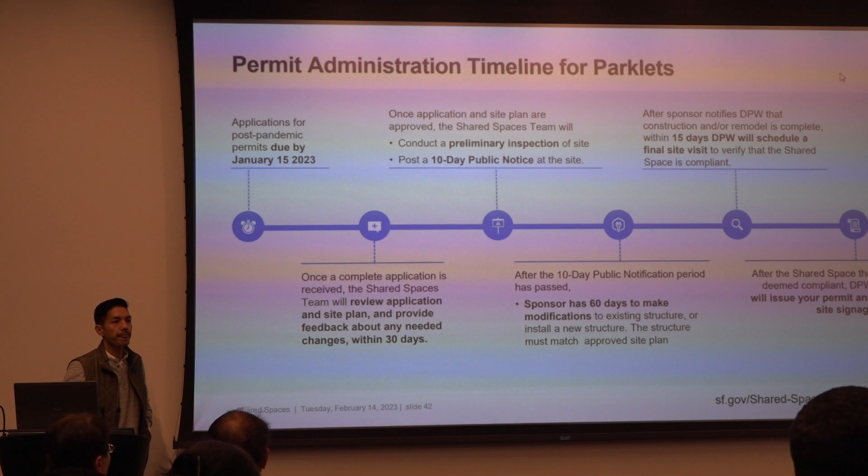Before I move to the next slide, was there a question in the back? Yeah, so I already applied and submitted a site plan, but I can't seem to get someone from your department to meet with me in person to go over the plan and discuss my issues. We have an appointment for that coming up later in the month, so you and I can connect after the presentation - I'll make sure we have someone. All right, thank you. Cool.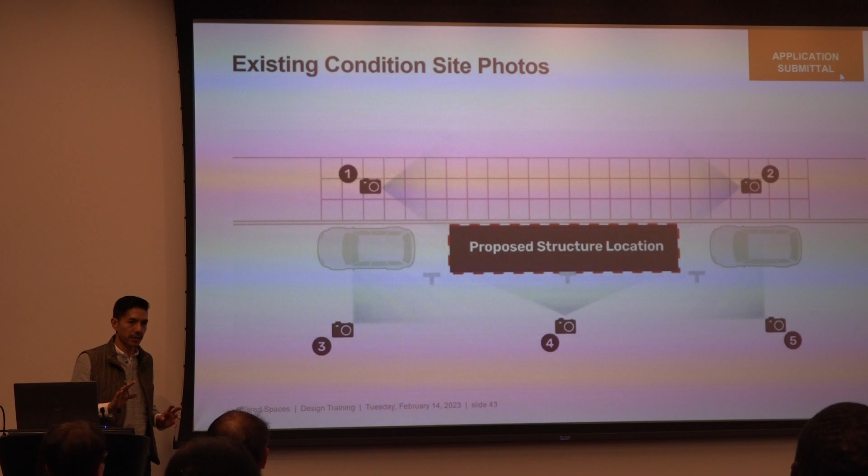Submitting the site plan, as part of your application, also include some quick photos of what's going on at your site - this could be an existing pandemic structure you already have, or a place where you'd like to put a parklet in the future. What does the sidewalk look like? Include a few different angles from the corner and an elevation. This helps our team give you the best advice possible as soon as possible.

Here's an example of a site plan. It should contain all of these elements: tell us how wide the sidewalk is, tell us where the building entrances are, tell us where trees and poles and that kind of thing are. If your parking spaces are marked, which is the majority of parking spaces in San Francisco commercial districts, they'll have white markings on the ground, these T's - tell us where those are, and where you want to put your parklet.

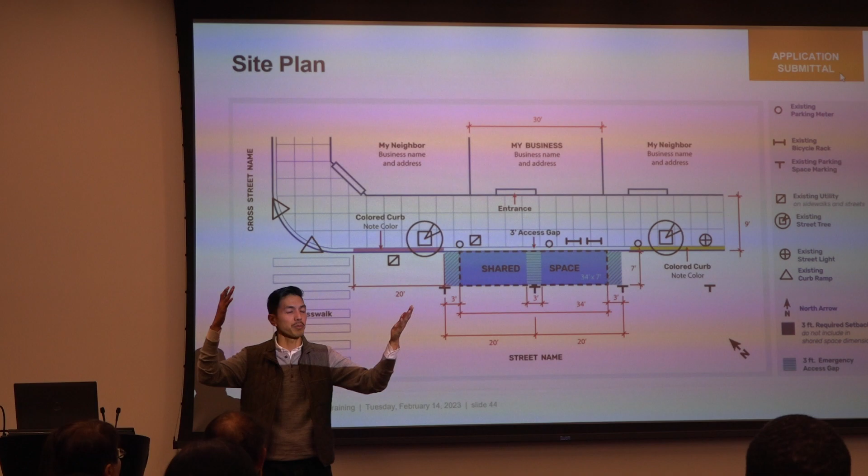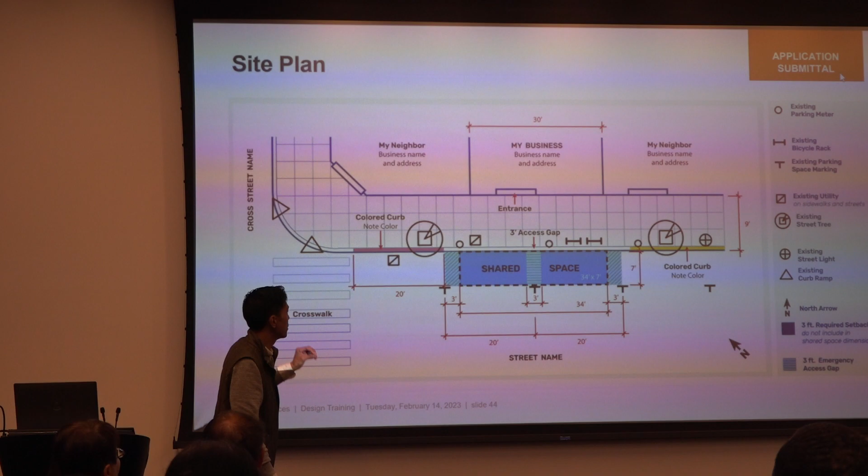This does not have to be prepared by an architect, engineer, or even a design professional. It can be hand-drawn and doesn't need to be drawn to scale. We just want to have all of this information and all of these dimensions to start with.

Oh gosh, we got a lot.

Folks have also been asking, both operators of parklets as well as neighbors of parklets: when does my neighbor need to give the city written consent that I can have a parklet?

This is a little bit more flexible than it was before the pandemic. The rule is, if you want to use a parking space that is half or more in front of somebody else's storefront, you're going to need their permission.

For example, say Monica's Pizzeria wants to take up these two parking spaces, and my storefront runs from here to the end of the screen. If I want to use a parking space in front of Monica's Pizzeria, but only about 40% of it is in front of Monica's...

In that case, I don't need to ask for her permission to submit a complete application. But if I want to take a parking space that is mostly in front of Monica's Pizzeria, not mine, then she has to provide written consent.

How about 50/50? It's half or more — so if half of it is in front of Monica, you do need to ask her. If less than half is in front of Monica, you don't. If half of it or more is in front of your neighbor, you need to ask for permission.

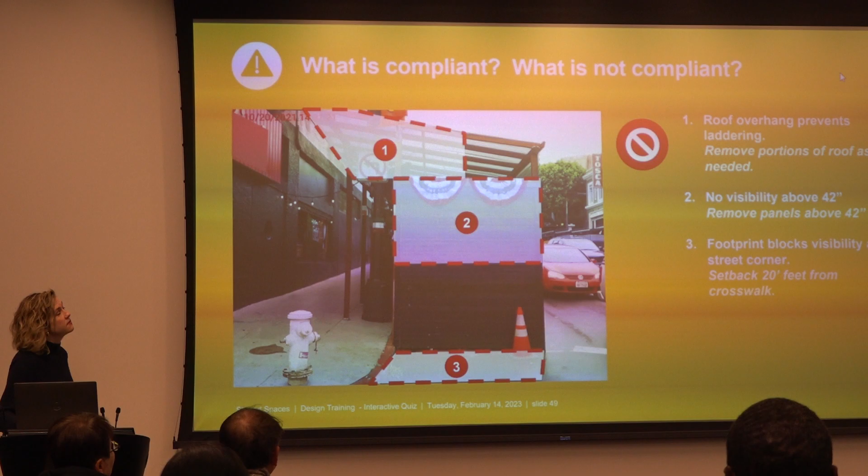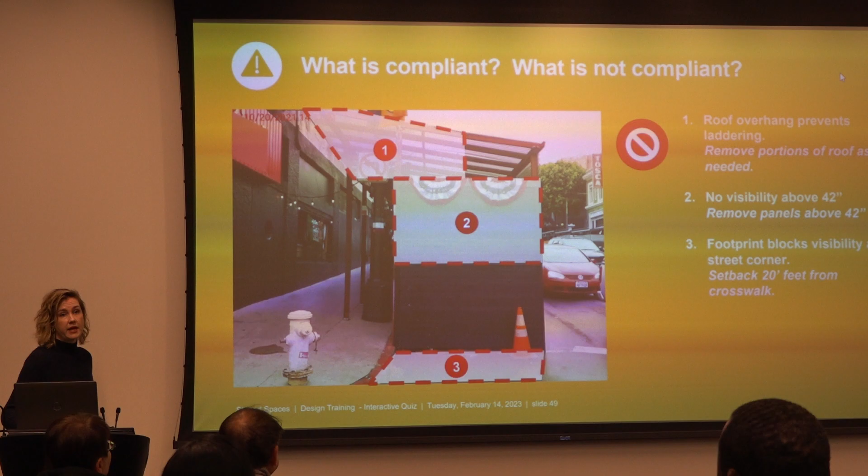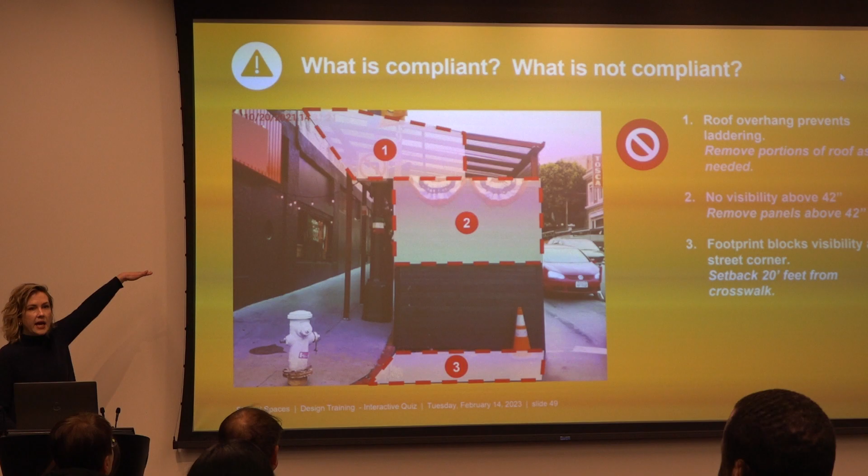Is there a requirement on how low the string lights can be? They need to be at least 10 feet high — see how they're 10 feet high? So I think the idea there is that the string lights are as high as the roof line, if you have a roof, of your parklet.

What about this one? No break point in the middle — yeah, no 3-foot gap. There's no 3-foot separation from the other parklets. Yeah, it's actually a 6-foot separation if it's 3 or 4 different parklets.

Since it's angled like that, if they need a 3-foot gap, do they have to create two structures? It's every 20 feet of the parklet. It doesn't have to be — the platform or deck of the parklet can be the continual line.

Say the right side of that parklet is on an angle — just say that's the only one there, and you need a 3-foot gap in between. Does it have to be at ground floor, or can you step up and then go? Yes, no — 3-foot gap, yeah, I see what you're saying.

Brandon, what do you say about that? Sorry, can you repeat the question? Do you guys need access from the street side if it's like that? So you mean the whole parklet, or just the one? Say the right parklet is the only existing one, and it's more than 20 feet — then yes, we require 3-foot gaps.

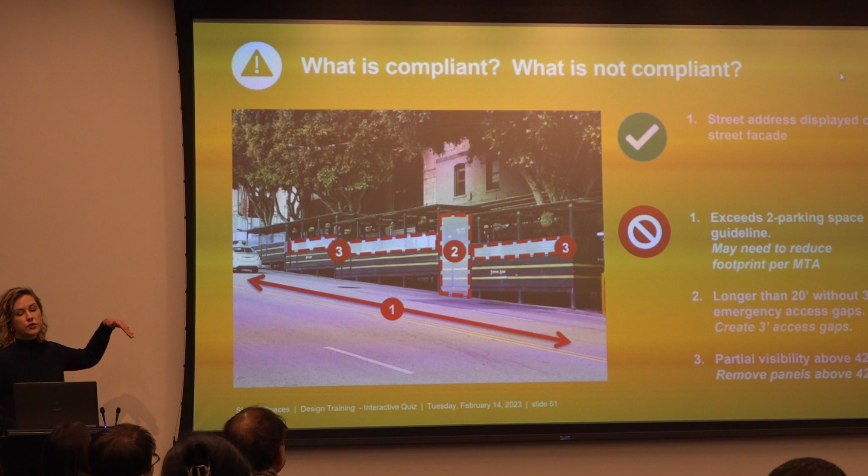So your thought about the string lights - they have to be up at 10 feet. If you have an awning that is standard 7 to 8 feet in the air, if you're 10 feet and above your awning, within the parklet it's fine, it's just on the other sidewalk side.

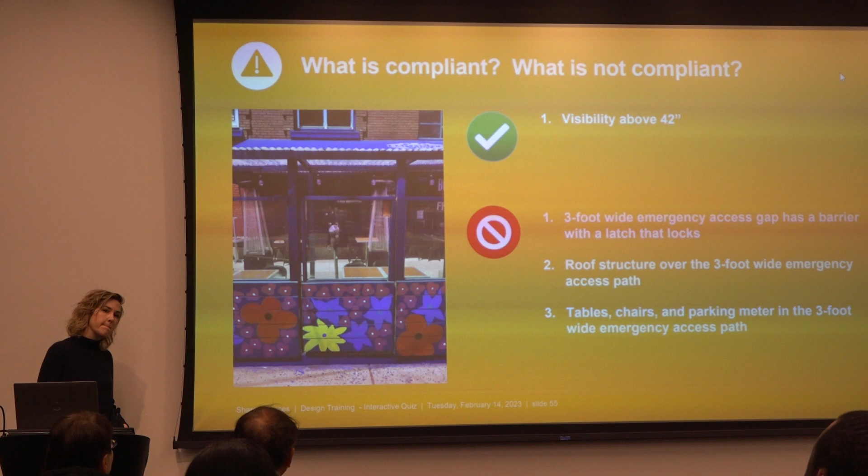Yeah, but on the sidewalk side, they say awnings are 7 to 8 feet in the air. Why can't the string light be at 7 or 8 feet to get underneath the awning so you can plug it in? Otherwise, it's got to go over the top of the awning, and it's really hard to reach over a 4-foot awning to plug it in.

I would just submit a site plan reflecting your plans, because oftentimes if you have a roof line, your intentions are to build a parklet with a roof, and the business on the other side has an awning. It becomes complicated because how would the fire department know where to put their ladder? There's an awning, a roof line, and a very narrow sidewalk space. I'd say it would be hard to find an example of a business that had an awning and a roof line that was still safe for emergency access, depending on the depth of the sidewalk.

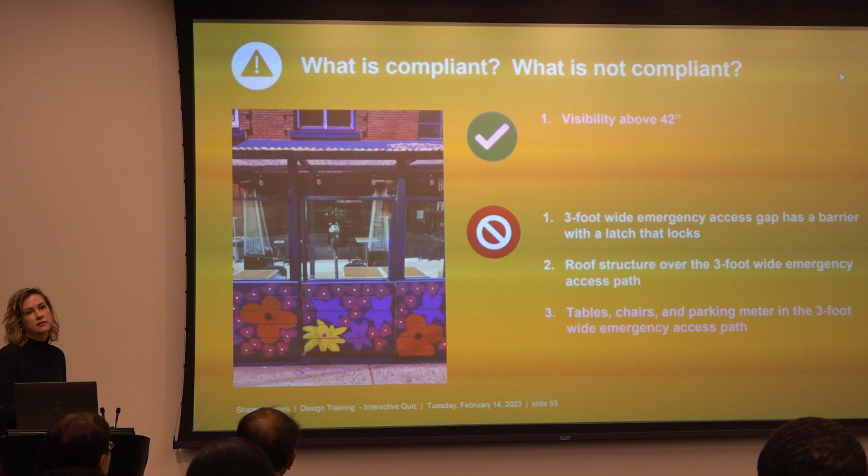How does the department view an overlapping roof? That's one thing to cover the parklet itself, but it all comes down to the depth of the sidewalk. Is that area 6 or 8 feet? I believe the measurement needs to be over 10 feet wide. That's a Public Works call, and they will review that during your site plan and let you know if you can have a cantilevered roof line.

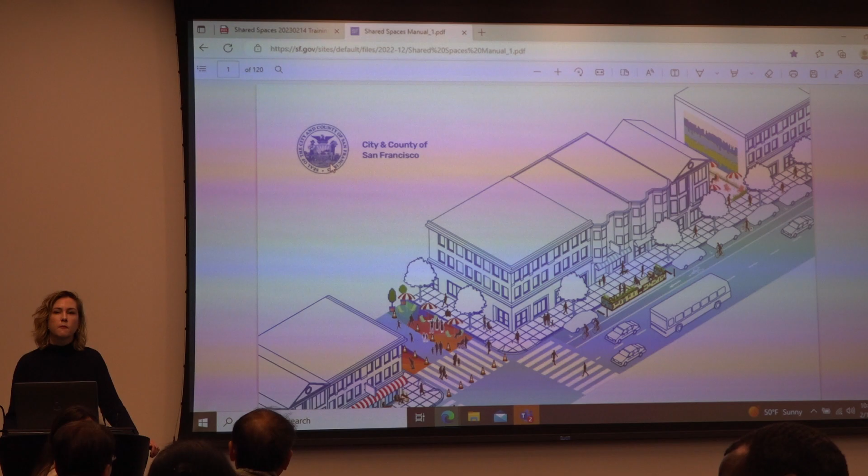I believe we submitted an application and haven't heard back. Has it been more than 30 days? I believe so. I can check in on your application personally.

I have a question: you're saying that part of the parklet needs to be reserved for public usage, even if they're not patrons of the business, right? Yes. So, homelessness, can they stay there then? I mean, if their business is... let's talk about this separately after, and I can address that question as well.

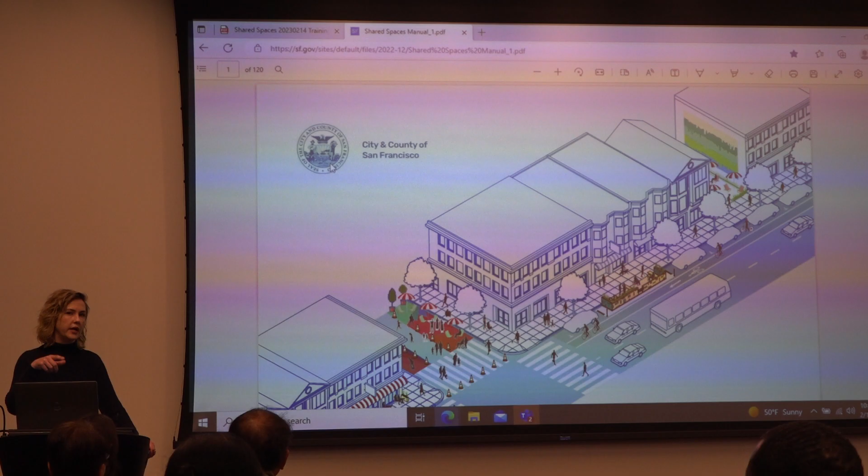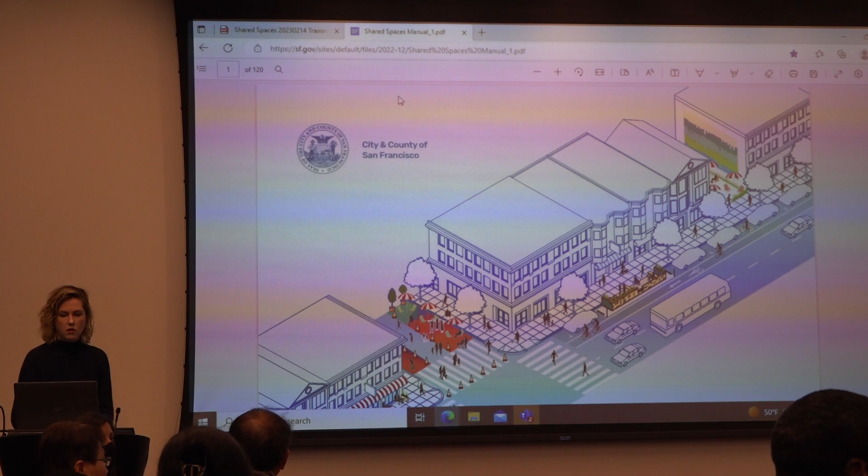Any other general questions? I don't know if my question is general, but we have a major homeless problem where I am, and I'm sure everyone's aware of that. I cannot have a parklet open, because when we had a parklet there, basically every morning I had to come and clean human feces and get the homeless out.

I'm going to stop you right there because there is an answer to this: you can gate your parklet. You are permitted to gate your parklet beginning April 1st. You can gate it now, but beginning April 1st, you can gate your parklet between the hours of midnight and 7 a.m. The important thing is that we can never obstruct a 3-foot emergency access gap. So the creative thing to do there would be to get scissor gates, which are those sort of foldable gates, where you can make sure that you have the 3-foot gap open.

So what you're saying is a scissor gate is okay? A scissor gate is okay, for your overnight closure.